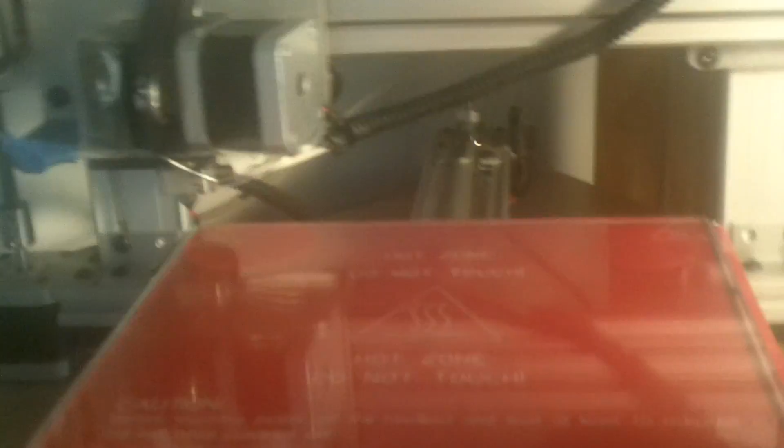And so now I'm going to cut away to the printer itself.

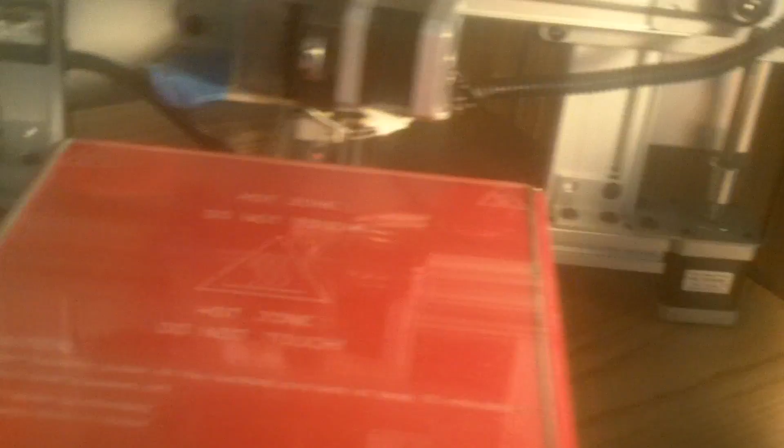So here's the general setup here. We have the print bed, the extruder. This extruder moves along the x-axis, and then these threaded bolts on each side, each driven by their own motor, actually provide lift for this along the Z. The bed itself - the extruder moves along the X and the Z, and then the bed itself moves along the Y.

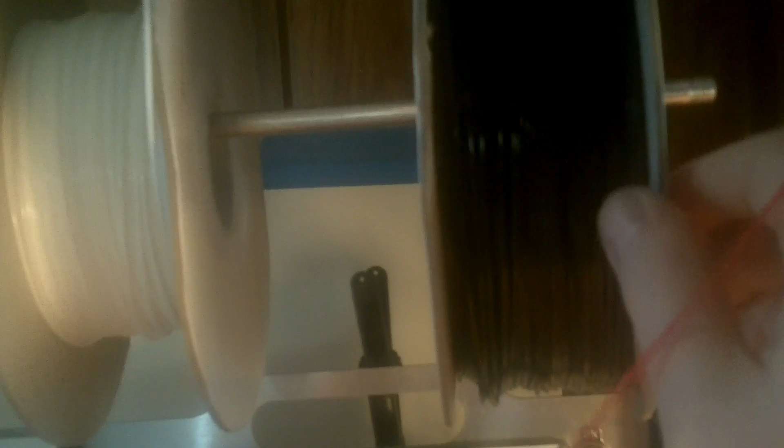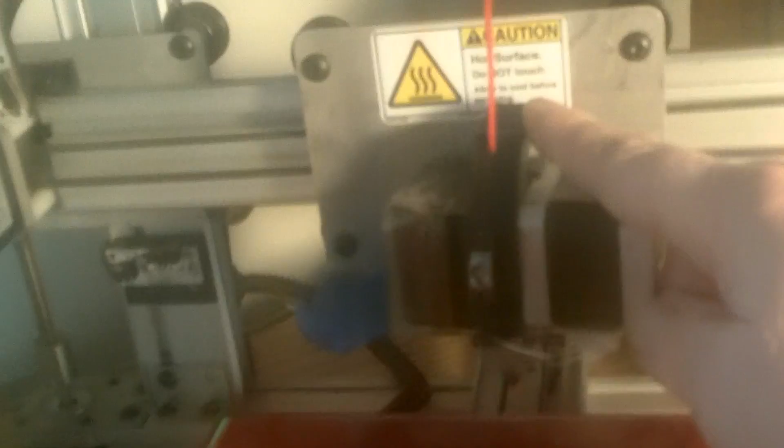So there are some customizations that are here, including this spool holder. This is nice because it keeps the spool right above the extruder, but if you have any entanglement causing a jamming, the force that it takes to pull this spool and advance it can actually pull down this spool holder, causing these bars to bend in slightly, which then jam the extruder head right into the part and can cause it to get knocked off axis.

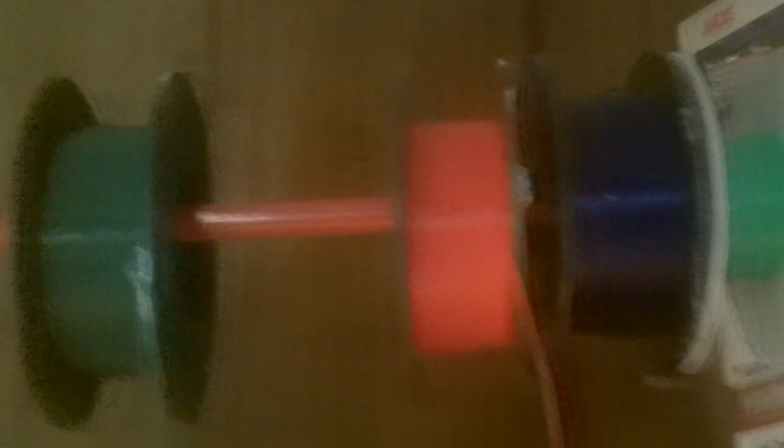So I also have this long rod hanging from the ceiling on which I can have more spools. This spool holder up top here is not attached to the printer itself, so it's a lot less likely to cause it to knock the printer off axis.

So what we have here is a heated bed. There's circuitry that goes under this glass top. And the first thing we're going to want to do is power this up.

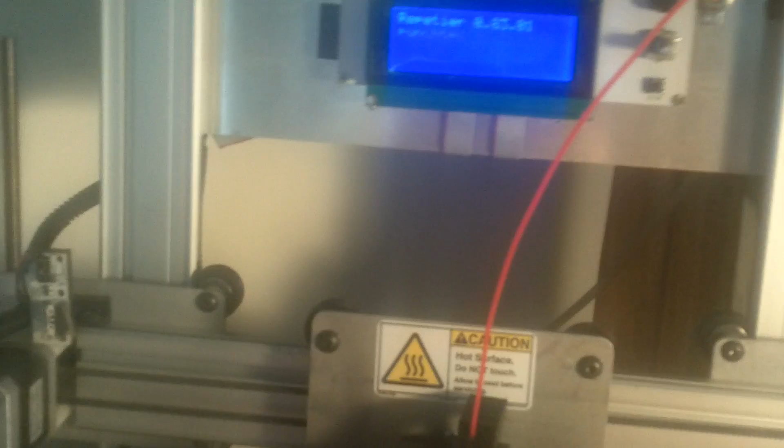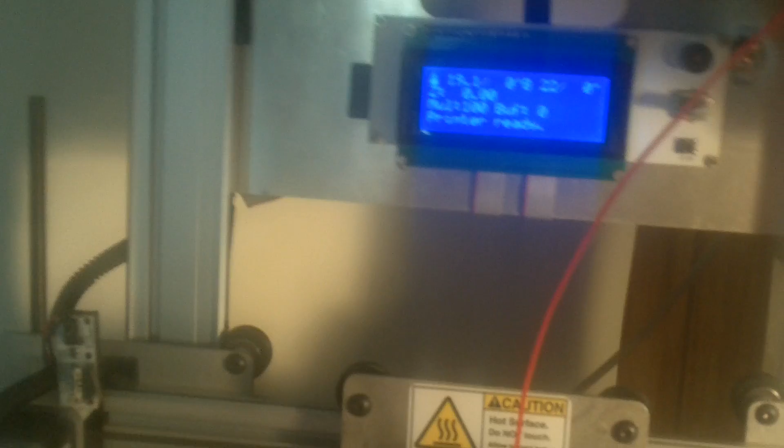And in the back we have a circuit board with a dedicated fan to that, and that's the fan you're hearing there. There's also another fan here to help keep the extruder tower cooled.

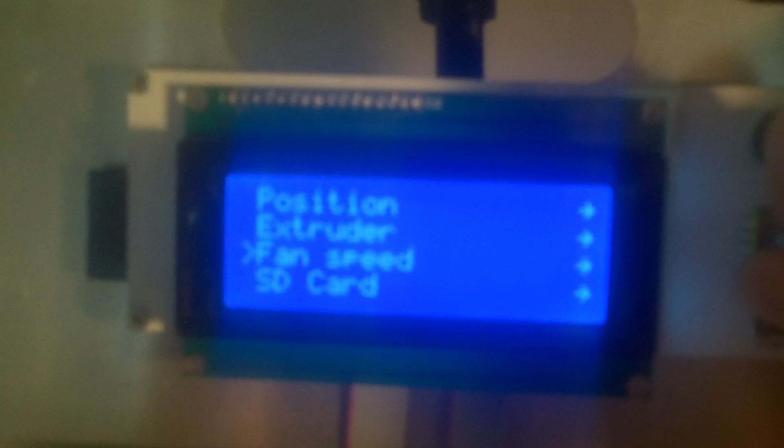So we do have some options in the firmware, including calibrating the Z-axis, some manual settings that we can control from our software, but that we can also control from here, including heating up the extruder, accessing the SD card to print from there, the fan speed, and some other configurations.

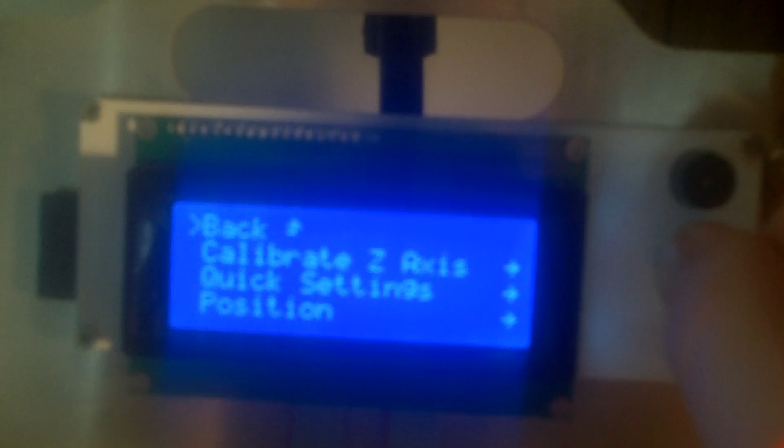The first thing we want to do, and I'll cut back to the computer screen for this, is we want to home the extruder. But before we even want to do that, you can see I have some filament here from the last print job that's just on the edge of it. It looks like I was able to knock it off. So we want to do that.

Oh actually, we're going to need to cut back to the computer screen, and we need to connect to the printer. So power that down, fire it back up. And then in the upper left-hand corner, click Connect.

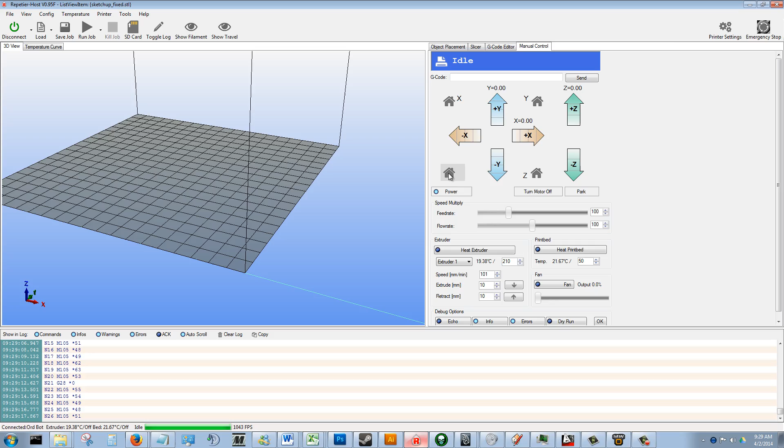So if I click on this button right here, I'm homing all of the positions. Any other button homes the respective X, Y, or Z values. But if I want to home all three, it'll get the printer into this home position, the front left. And you can tell I could use a little bit of oil here on this rod to keep that squeaking down.

Okay, so now to level your printer, what you want to do is have a standard piece of paper, printer paper. Grab one of those, and then you want to fold it in half so that it's 2 layers. Now slide it under the extruder head, and you should be able to move it back and forth with some resistance from the extruder head. So again, it should be enough so that you can move the piece of paper, but not enough that you don't feel any friction with the extruder head.

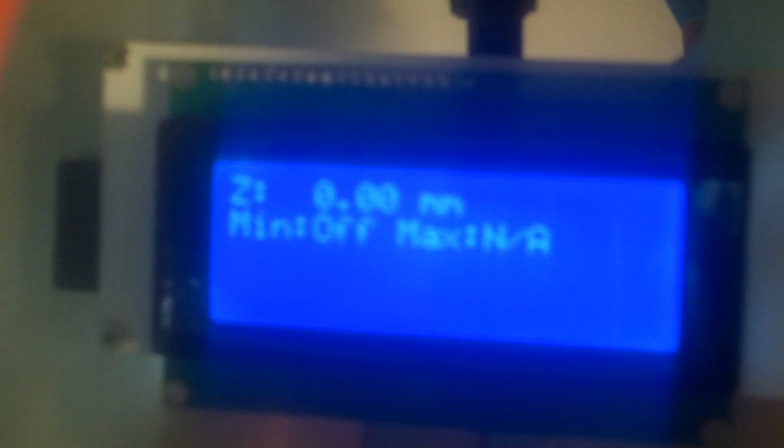And so you want to have the same amount of friction all over the print bed. Now if you find that you have a general all over the bed sort of issue where the extruder's too low or too high, you can come in here and calibrate the Z position by either taking it up or down. We're going to leave it as is.

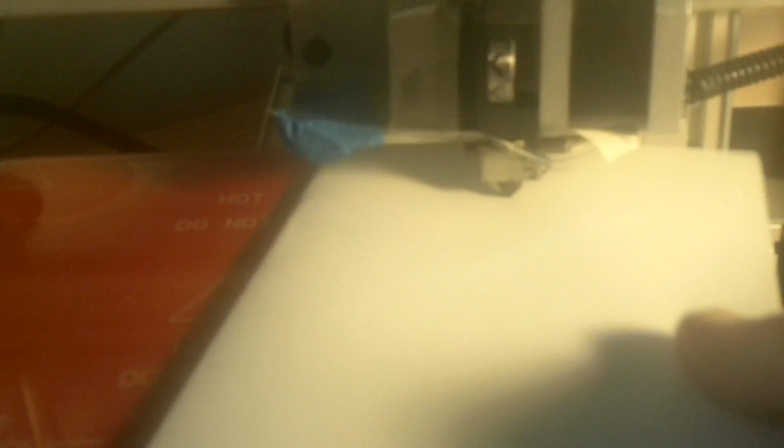Now, for instance, over here in the upper back right corner, I have a little bit too much friction. So what we have here, we have 4 set screws with springs on each of them. And on the back right, what I can do is just torque this one down just ever so slightly, and then check again until I have an equal amount of pressure, a consistent amount of pressure across the print bed.

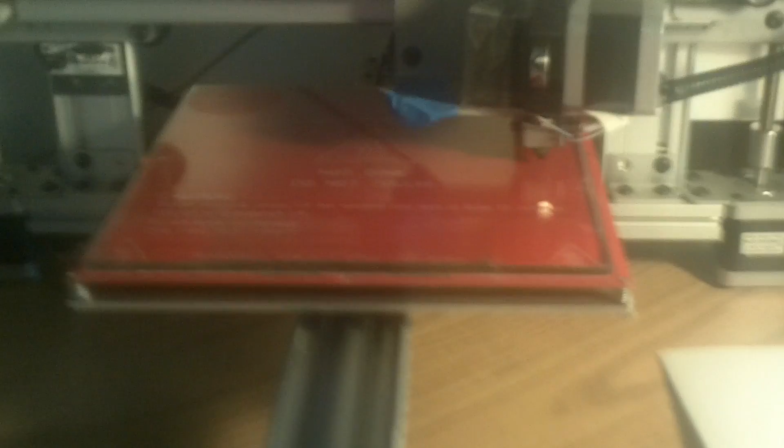Okay, so once you have an equal amount, you want to home the printer again.

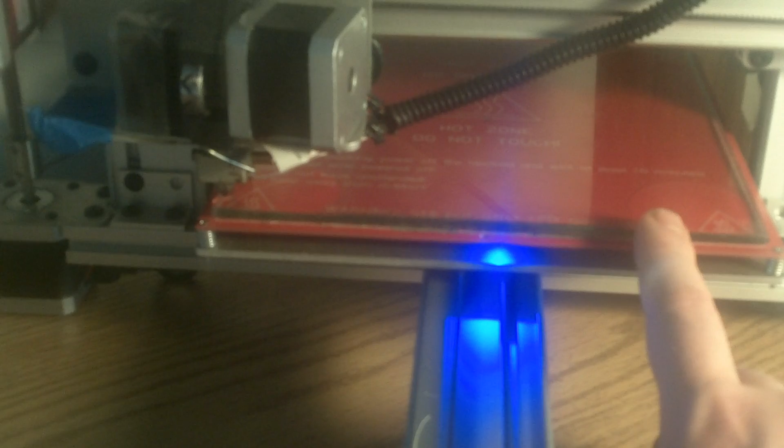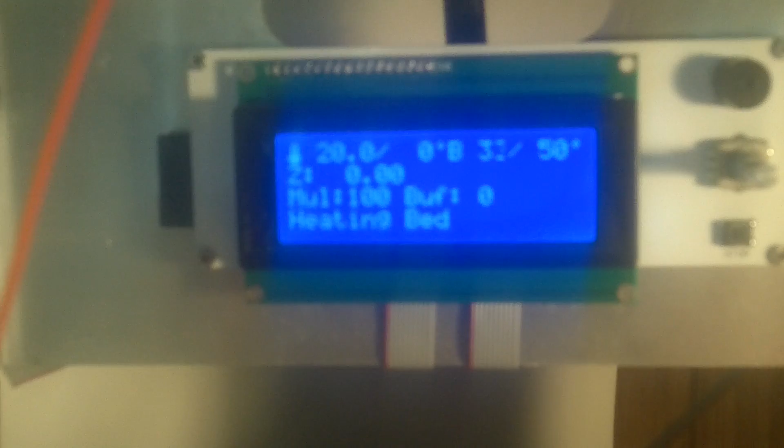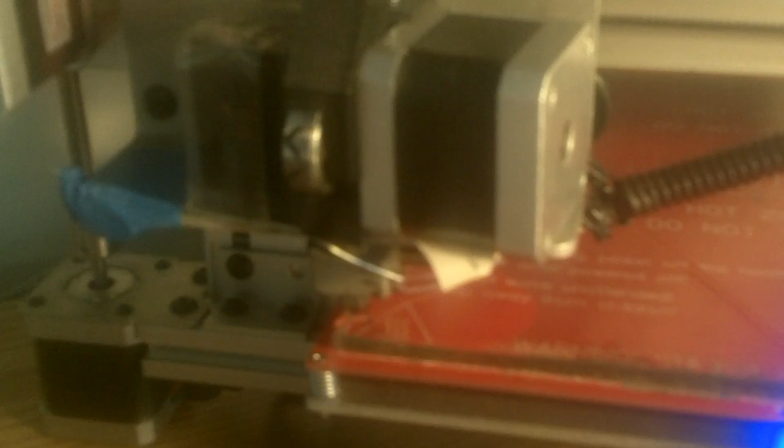And you notice something started happening here. If we cut back to the camera, you see this indicator light came on, indicating to us that current is moving to the print bed, and it is being heated up. So first, the print bed will be brought up to a temperature of 50 degrees Celsius. Once it reaches that temperature, it will maintain the temperature, and then also the extruder will start heating up to the set temperature around 200 degrees Celsius, something that we defined in our slicer settings.

Once the extruder and the bed are both up to temperature, then the actual print process will take place, where we have our 3 loops for a skirt, and then the actual layers will start to come up.

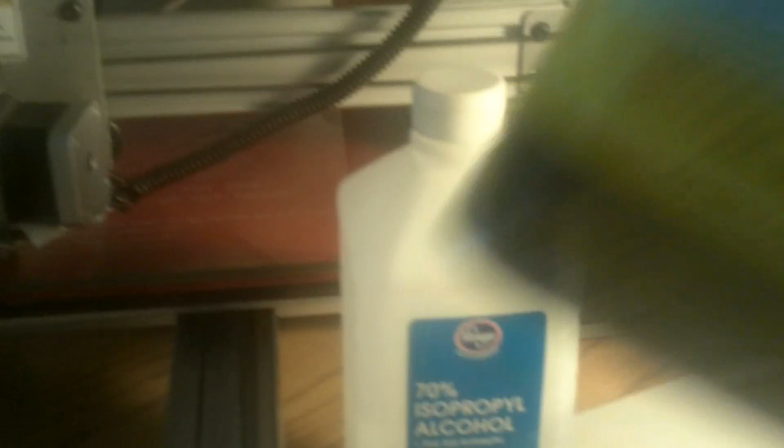One thing I didn't show you is that if you want to surface prep, before we actually hit run job, we could use some tissue and any type of alcohol solvent, just to wipe down that glass surface and have that ready to go. If we have any kind of oils on that glass surface from our hand, then the extruded filament will have a tough time sticking to it.

So right now you notice that it rehomed itself. That's because the bed temperature got up to temperature, and now we have an intermittent light telling us that it's just holding it at 50 degrees Celsius. There's not a constant current required in order just to hold the temperature, and we heard a second fan kick on.

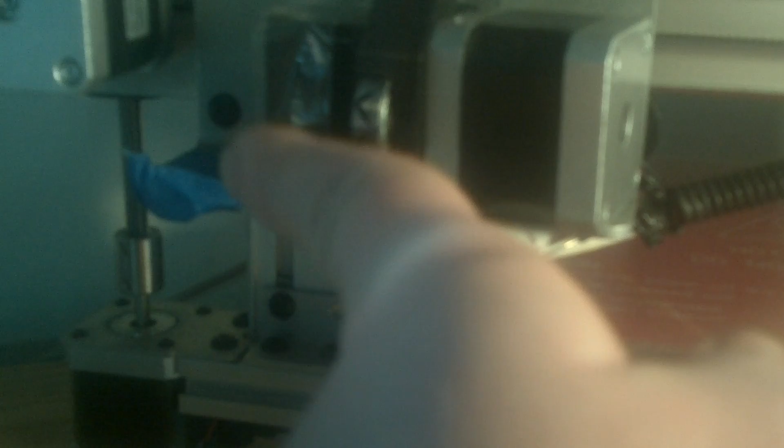That's because the extruder is now being brought up to temperature, and this fan here is pushing air out that way, pulling it in from these slots. On the other side of these slots is the actual filament being fed in with a stepper gear rotating this way, combined with the pressure of this ball bearing.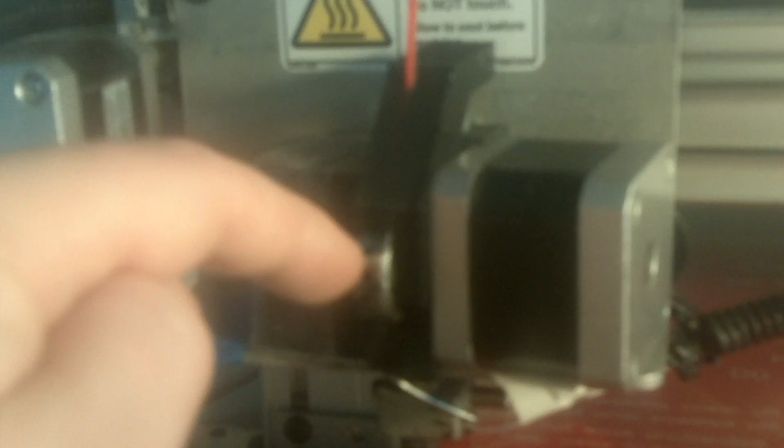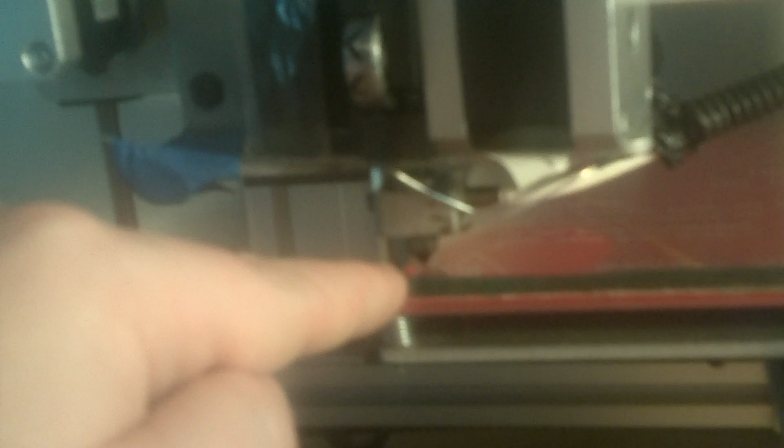So this spring is applying pressure towards the gear head. The gear head locks against this ball bearing, the gear drives downward, forcing the filament down, out, and through the extruder tip. This extruder tip is the only thing being heated right now, up to about 200 degrees Celsius. So the idea is that the filament does not get up to this temperature until it's fed into the hot end. This tip right here, and there should be no heat in between anywhere except there.

But heat does creep upwards, and to mitigate that, that's where this cooling tower and fan comes in. So we're almost there. Now you can see our temperature is reaching up to just passing 200 degrees Celsius, and just a few more seconds and the process will begin.

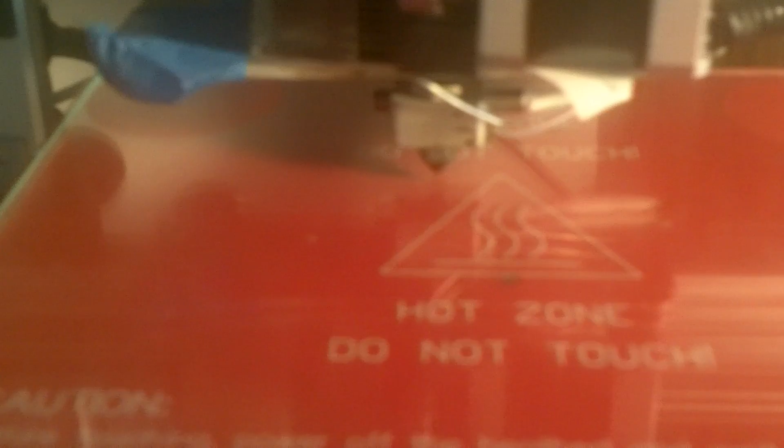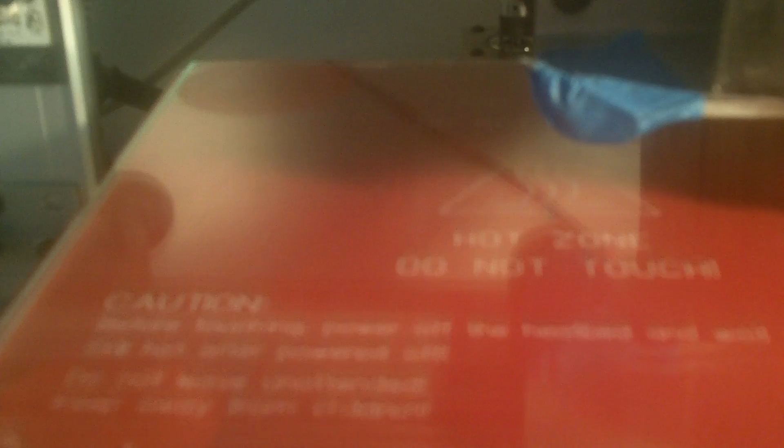You can see it can take a few laps without any actual filament coming out of the extruder head. That's why we put 3 down for that skirting. Okay, so this is interesting. Right now, there's absolutely no filament coming out, and I'll tell you what, so what we want to do right now, we'll cut back to the computer monitor, and we'll click Kill Job.

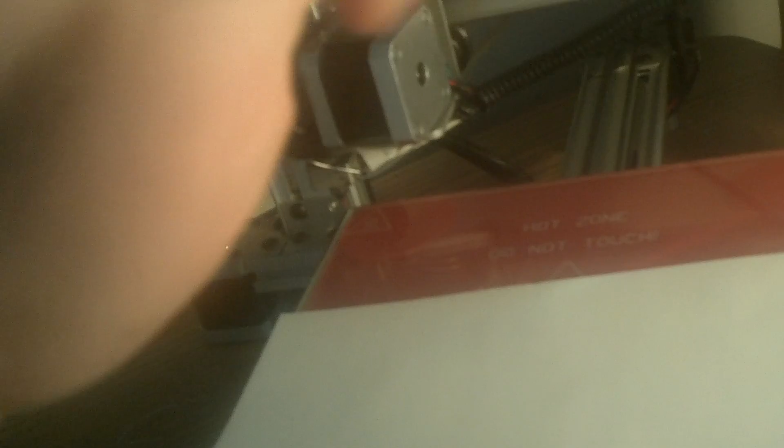And that will come back to the camera. Now the first thing I'll do is actually just push down, apply pressure on this spring to release the ball bearing, pull this out, and what had happened from a previous print is that during the cool down period after the job was done, heat continued to be fed up the filament, causing a swelling here. This amount of swelling was enough so that it would not be able to be fed down into the extruder shaft.

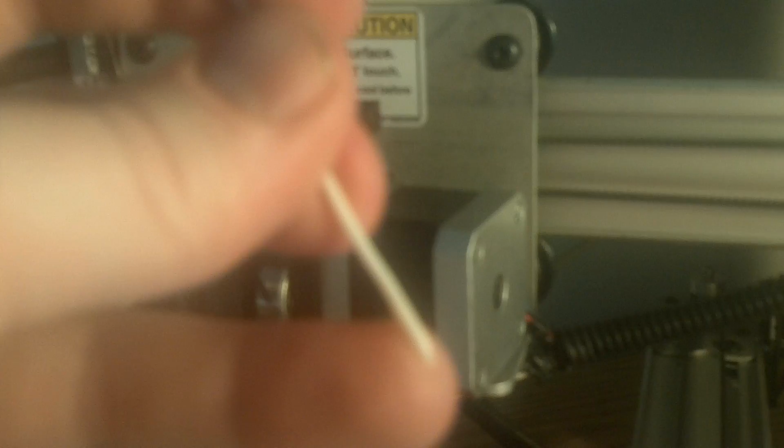So in addition to changing this out, I'm also going to change to a white filament, so it's easier for us to see rather than that red filament on red base. And what we're going to want to do here is, just to ensure we have a clean end, we're just going to break this off with my hands. It just snaps. So this is an interesting experiment, how to 3D print with one hand, but we'll do it.

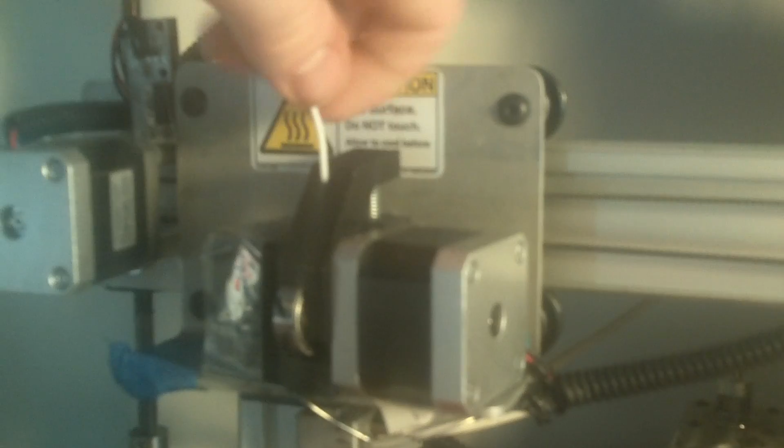Next thing we want to do here is straighten out the line. When this filament is created, it itself is extruded right onto these spools, so it really saves its shape when it's being thermoprocessed. And we want to put it in the same way that we took it out. So insert and then apply pressure on the spring. Now for this part I'm going to have to set the camera down, so stand by.

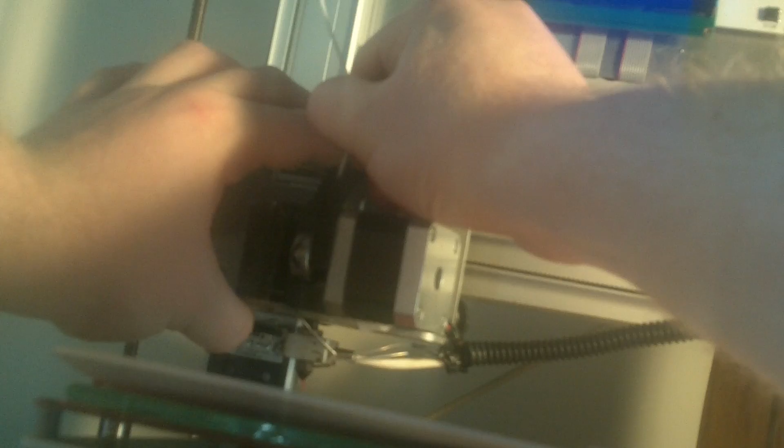Okay, well, I could not get the filament to go back down into the drive, so I took this opportunity to expose the gear, the drive gear that drives the filament, and I don't see anything that's in the way. Sometimes you'll have some obstructions here. Let's see if we can get a light on that.

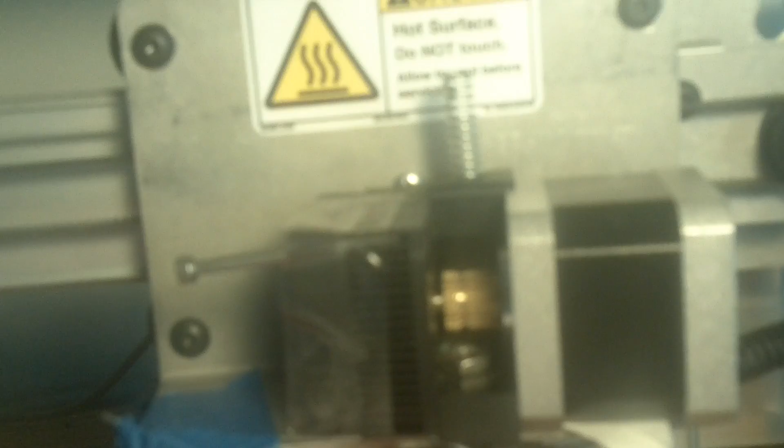But I don't see any obstructions, and so what we're going to do here is, here's the part that I took off. So you can see how this slips on here, and it forces the ball bearing against the drive. And the filament sits right in here and goes down there. So we'll put this back together again first.

Okay. So let me go back to the computer and actually heat up the extruder. Let's do this process hot.

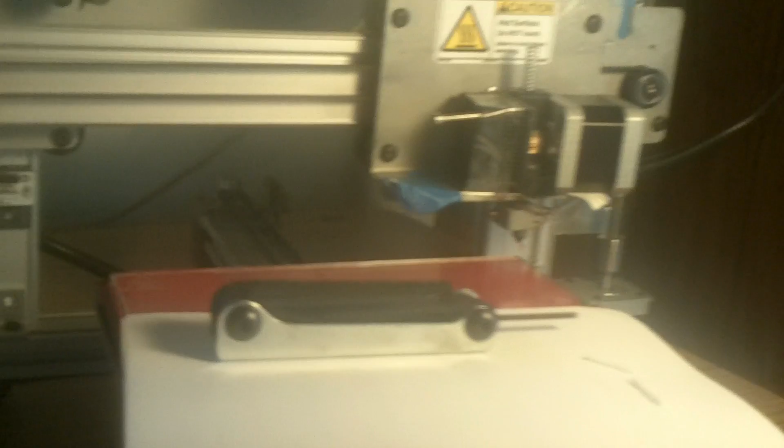If we're looking at the computer screen right now, what I do is manually click on heat extruder. Now we can see that it's going to heat that up to 210, which is just our default working temperature right now. So we'll wait till that gets up to about 170 or 180, and then we'll be able to press that filament through the extruder head and reassemble this piece.

While I do that, I'll turn the camera off. But basically there's a screw that goes through this piece and holds it in there. So, alright, when we come back, we'll have this all reassembled.

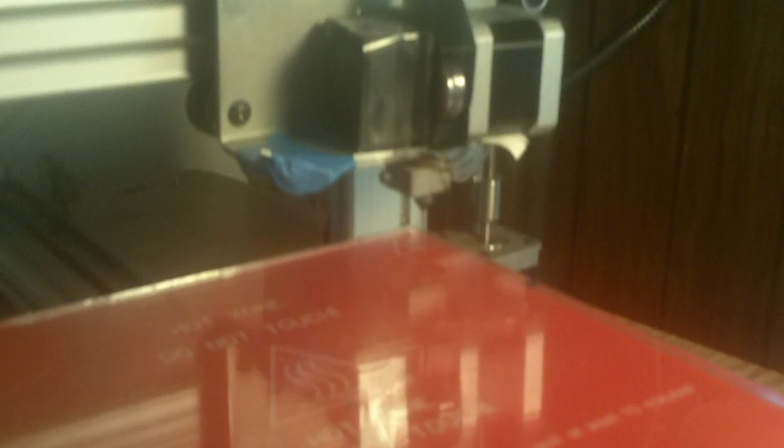We'll have the filament going through, everything will be working. Okay, so we've got the filament fed back into the extruder. What we're going to do here, just to ensure we have a good feed, I'm going to cut to the computer screen. First, we'll get the extruder into the home position, then we'll raise it up about 30 millimeters here.

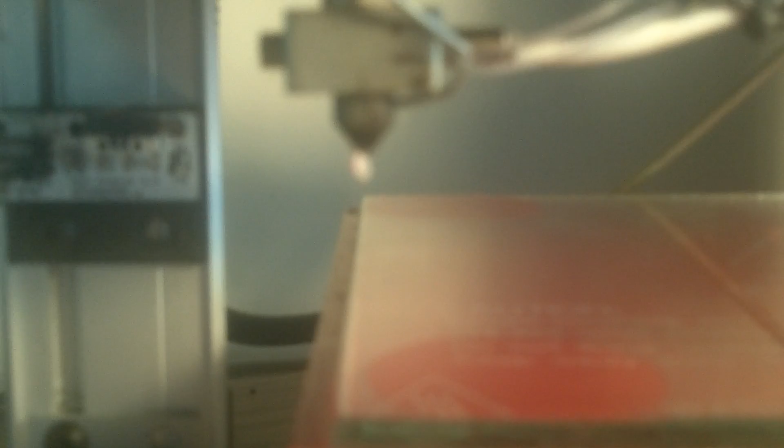Now I've got the extruder manually heated, and we're going to extrude this 30 millimeters. Right now we look at the extruder, and we can begin to see nice clean flow there. It doesn't go off to the side, it goes straight down, comes out at a nice consistent rate.

So then let's turn off the extruder heat, and back to the printer again. Once this stops flowing, we'll just pull this away, clear that off, and then again, just like before, we'll now run the job. The printer bed will start to heat up and get up to temperature, and then it will home the position of the extruder. The extruder will come up to temperature, and I'll cut away in between now and then.

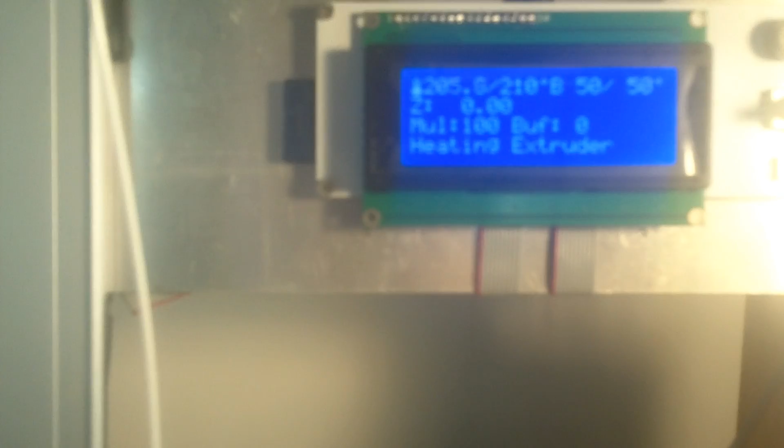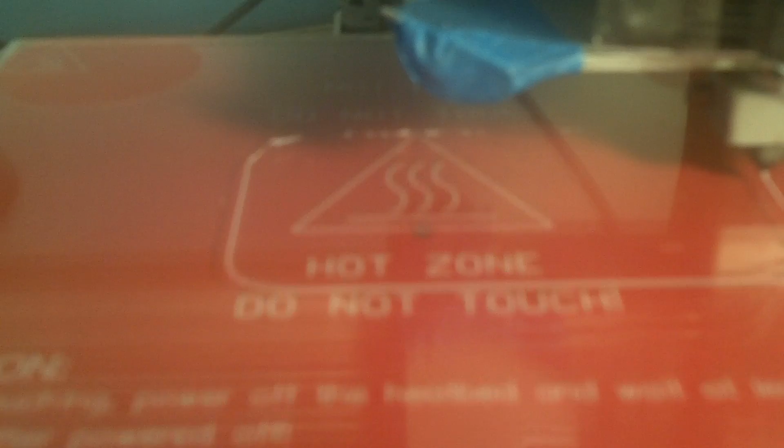Okay, our bed's up to temperature and our extruder is just about up to temperature, and it's going to start here in just a second. Now we're getting a solid line there after the first loop, so it's good to go around 2 or 3 times.

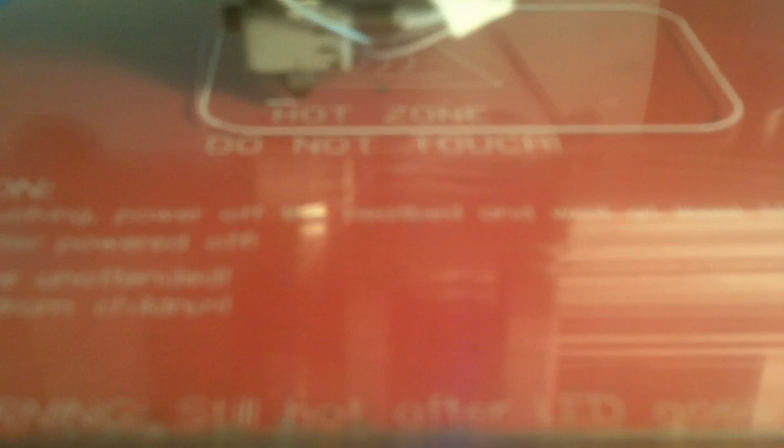So that's the skirt, and now we're actually printing the exterior of the first layer, the perimeter of the first layer. It prints the inside perimeter first, then 2, and then 3 would be the final perimeter.

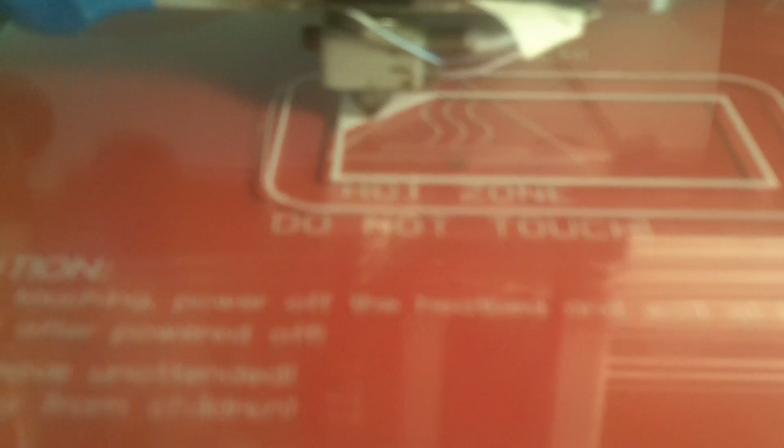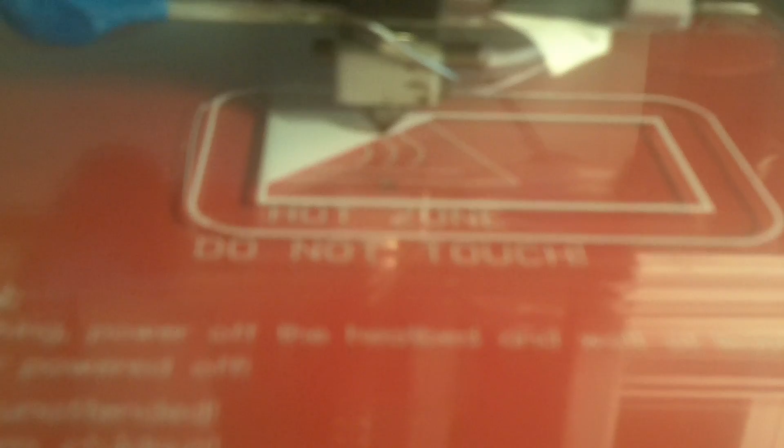And now for the bottom, 3 layers are all solid, even though I've got the infill set at 40% density. We'll be able to see what 40% density looks like on the 4th layer. But the first 3 layers and the top 3 layers are going to be 100% solid infill, and that's what we're seeing here.

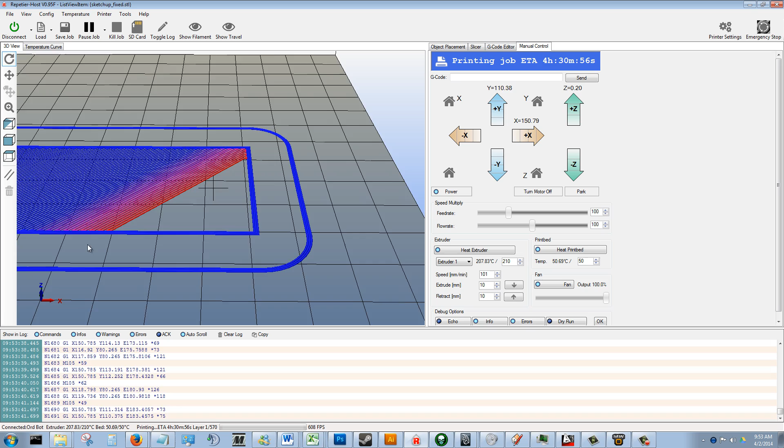So right now, if we cut back to the computer screen, we can actually see the progress of our G-code and an estimated time of the filament that's being laid down. So if we wanted to, we could view this computer screen remotely, but we need to remember that even if our piece fouls up and becomes off track, or if filament stops being extruded, this picture will remain the same and it'll continue nonetheless.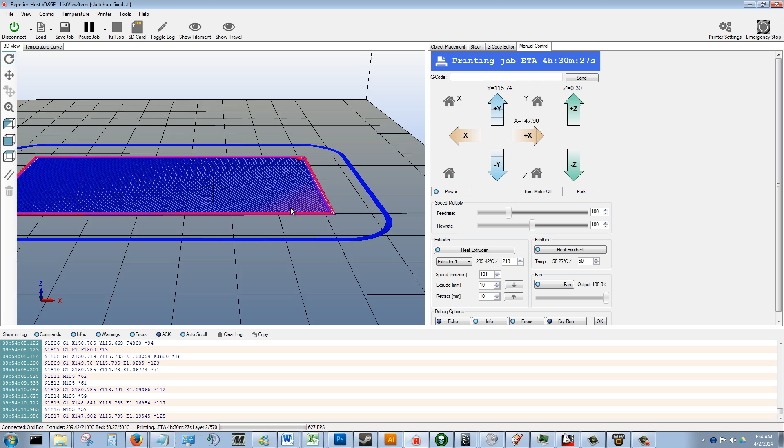So we don't really need to count on this, but it is a good estimation. If you're wondering where you are in your print, what you can do is click the object and then go back to here, so we can get an idea of how much time we have remaining, etc. Also, there is a print job estimation of time, which is based on our feed rate.

So I'm still on the computer screen here, and what we could do, I could turn this feed rate up to 150%, which basically accelerates all the speeds we have in place to a factor of 1.5. I'll do that now. I'll place this manually, I'll type in 150. Now if we see the difference, the time cut drastically by over 25%.

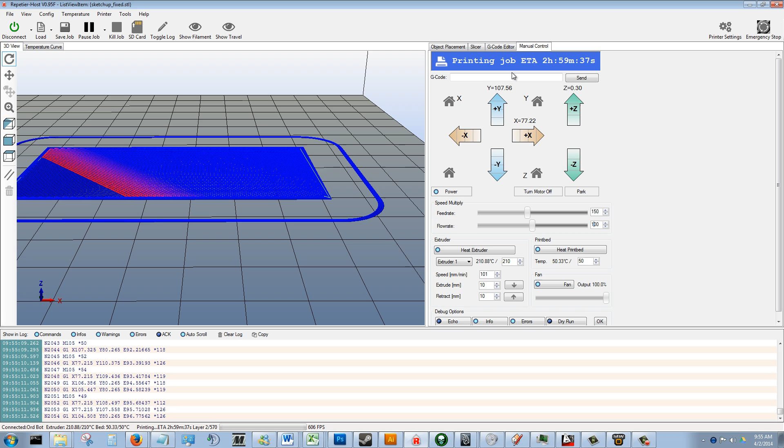And if we cut back to the printer, now you can see it's printing faster. And we heard that also in the frequency, the sound actually given off by the stepper motor, a higher frequency.

And this is printing the 2nd layer. This printer can handle speeds up to 200 millimeters a second. And that's filament leaving the extruder head, 200 millimeters a second.

Or actually that's movement speed, right? Right now we're going about 90 millimeters a second, and that's the actual movement. I apologize, it's not the amount of filament coming out of the extruder head, but it's the travel speed. So right now this extruder head's traveling at about 90 millimeters a second.

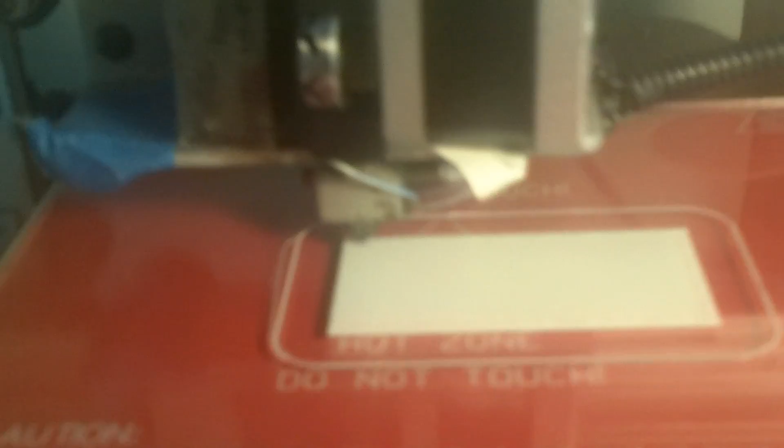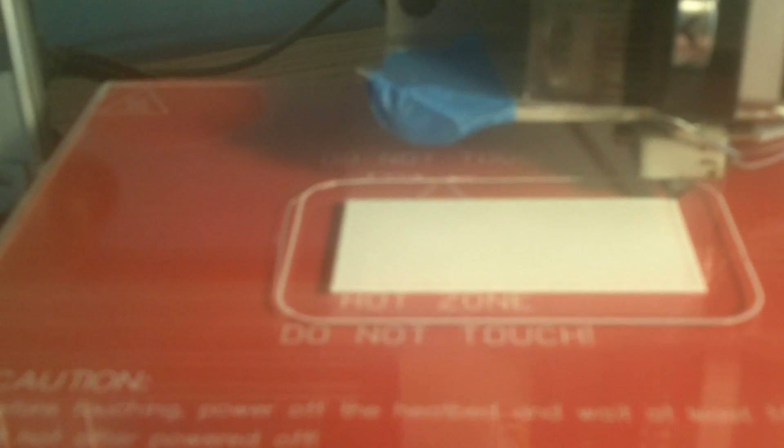Now there you can see that 40% infill. You see how it's taken large gaps now. I know it's hard to show up until you get a few layers down to really see the effect of that 40% infill, especially it being the same color on color. But you can see how it's taking, basically it's not putting filament down over 60% of the area, okay?

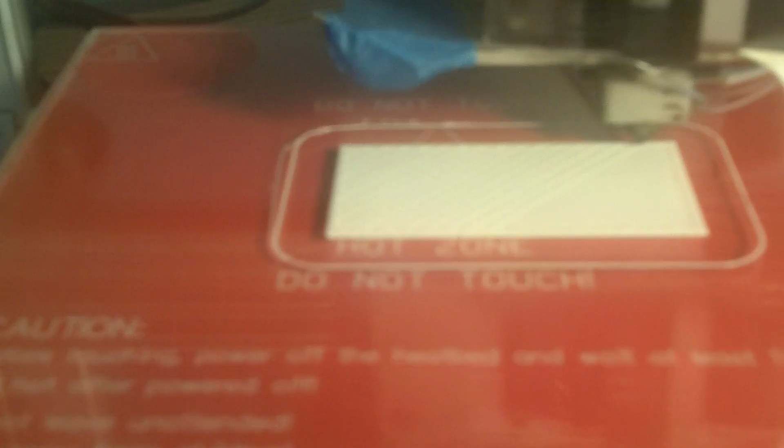So in this way we can drastically reduce material costs and print times by, if we're just printing a prototype and we don't need a 100% densely filled working unit, then we can do this to cut costs and time.

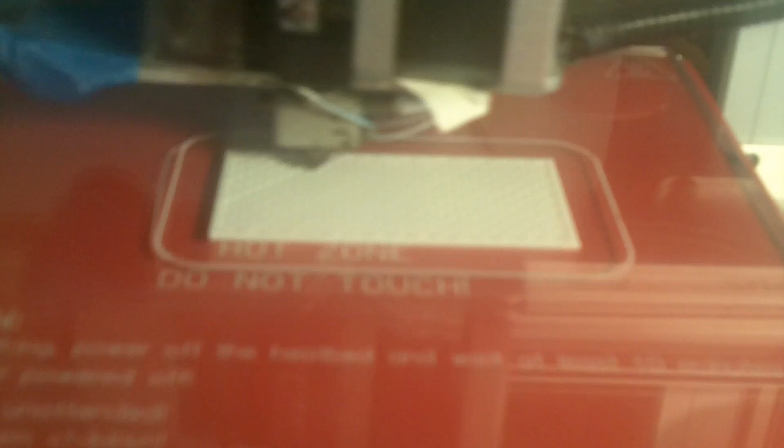So this is scheduled to print for another 2 hours and 57 minutes. What I'll do is come back here in the middle of the print, and then at the end of the print with more film to round out this video.